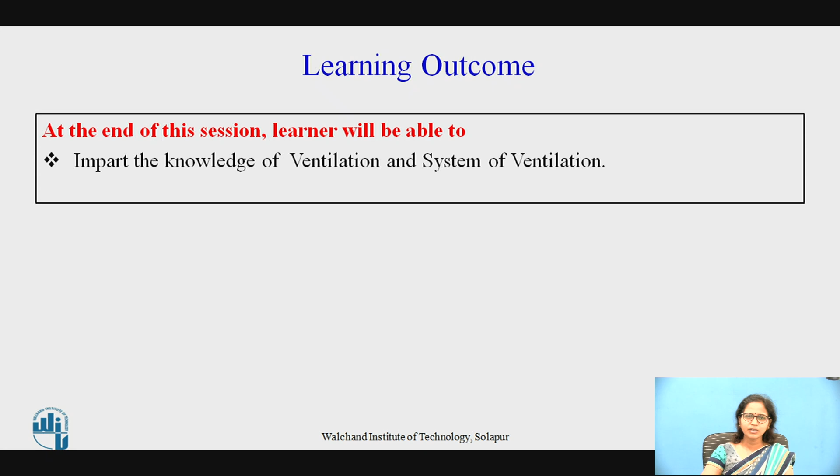So ventilation is defined as a process of removing or supplying the air by the natural or the mechanical means to and from an air source or any space. So actually ventilation is to remove the contaminated air which is infected due to the products of the combustion, or it may be due to the odors. So it has to be replaced by the fresh air. So the sufficient ventilation is to be supplied to a room.

So as it may be due to the increase in the temperature or due to the air which is infected, and to remove the contaminated air which is infected by the bacteria, respiration, etc. So actually an unventilated room may lead to the discomfort to the living conditions of the people, and also that may be due to the increase in the dust amount, or it may be due to the increase in the excessive carbon dioxide, carbon monoxide, etc.

So next, a poor ventilation room may lead to the discomfort or the uncomfortable living conditions to the occupants who are actually using the building. So that may be due to the increase in the temperature limits which has to be maintained. It may also cause lack of sweating and humidity, which may lead to the inattentiveness, and it may cause even the headache or the sleepiness. So sufficient ventilation has to be provided for the rooms.

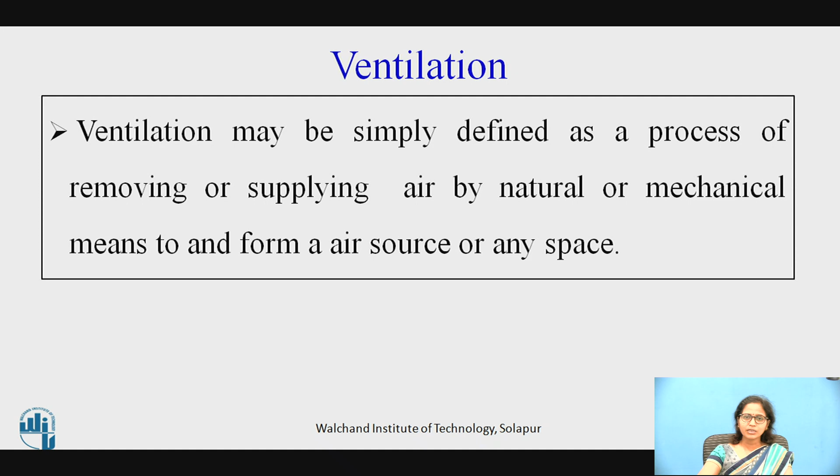So even the ventilation which is needed for the breathing, other than that the fresh air which is needed to survive in the room itself, depends upon the outer conditions, where exactly the building is located. So depending upon the outer conditions such as the concentration of the carbon dioxide and all, the minimum quantity of the fresh air has to be supplied to any type of the building. So for this the ventilation system has to be taken into consideration.

So the importance of the ventilation. Actually it prevents the undue concentration of the body odors, the fumes, dust and the other industrial products. And also it prevents the undue concentration of the bacteria carrying the particles. And it removes the products of the combustion, and in some cases it removes the body heat and the heat liberated by the operation of the electrical and the mechanical equipment.

And actually there should be continuous air movement or air changes should take place in the building or in the room, as due to the working of the machines or anything there may be heat liberated, and that air has to be replaced. The air which is contaminated, or if it is infected due to the products of the bacteria or the body fumes, anything, has to be replaced by the fresh air. So there has to be continuous air movement or the air changes. So to create the healthy living conditions, ventilation is also important.

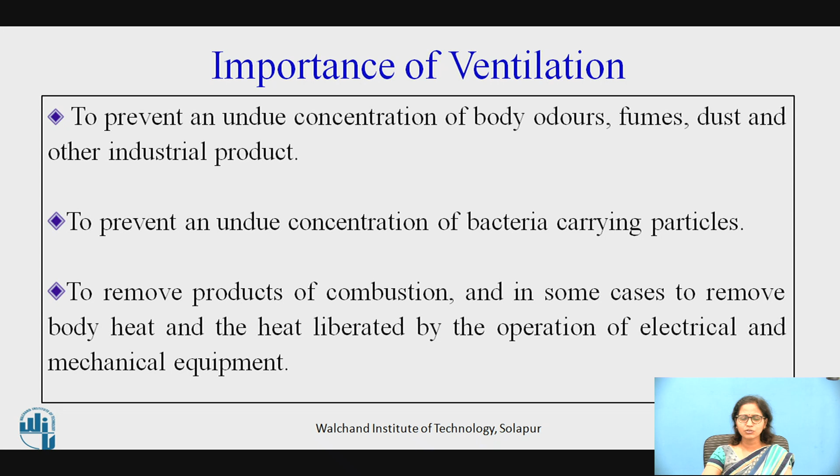So the number of the doors and the windows has to be provided in all types of the building and in the rooms. So depending upon the use of the room, number of doors and the windows has to be decided depending upon the number of the occupants also, and the age of the occupants, that factor also has to be considered while deciding the system of the ventilation.

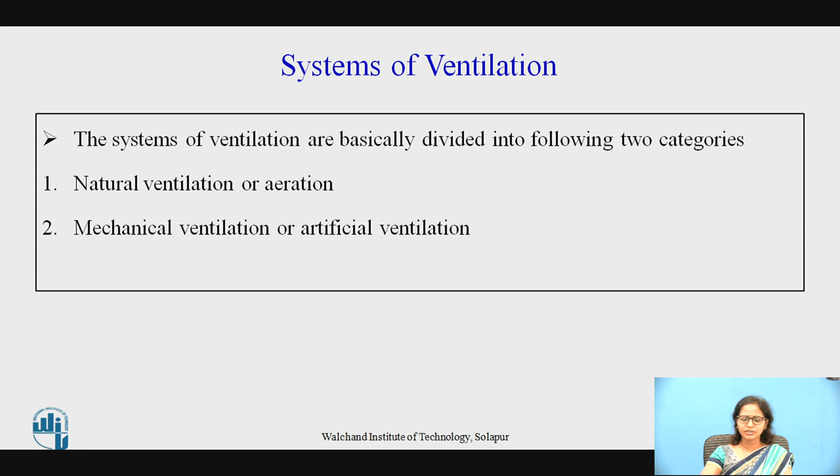So these are the systems such as natural ventilation, which is called as the aeration, and second is the mechanical ventilation or the artificial ventilation. So these are the systems of the ventilation. Actually there are different types of the systems. So out of that we are going to see the natural ventilation and the mechanical ventilation.

So in the natural ventilation, actually the number of doors and the windows are provided. So the outside air is supplied into a building through doors and windows, ventilators or any other openings. So minimum quantity of the fresh air has to be supplied to any type of the building. So this system may be employed where precise control over the air's conditions and the rate of the air changes is not required. So the minimum and the maximum rate of the air changes per hour are 1 and 60.

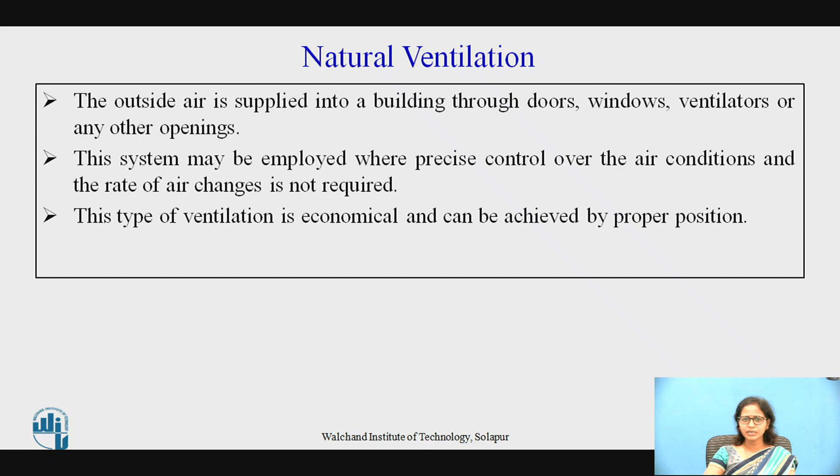So this type of the ventilation is economical and it can be achieved by the proper position. Whereas in the auditoriums or the shopping malls, this type of the ventilation is not at all feasible.

So the rate of ventilation depends upon two factors, the wind effect and the stack effect. In the wind effect, the ventilation is affected by the velocity and the direction of the wind, which depends upon the size and the position of the openings. So here you can see when the wind blows, this is the wind movement.

So pressure differences are found. On the windward side, positive pressures are developed, whereas on the leeward side we have negative pressures. On the opposite side you can see there is suction developed over there. So this is a roof pitch greater than 30 degrees.

So let's see when the roof pitch is less than 30 degrees. Positive pressures are created on the windward side, whereas negative pressures are developed on the leeward side, and suction is developed on the opposite side. Next is the flat roof. Even in this case, the wind effect will be the same. Positive pressures are developed on the windward side and negative pressures on the leeward side, and suction is developed on either side. So these are the wind pressure and suction zones.

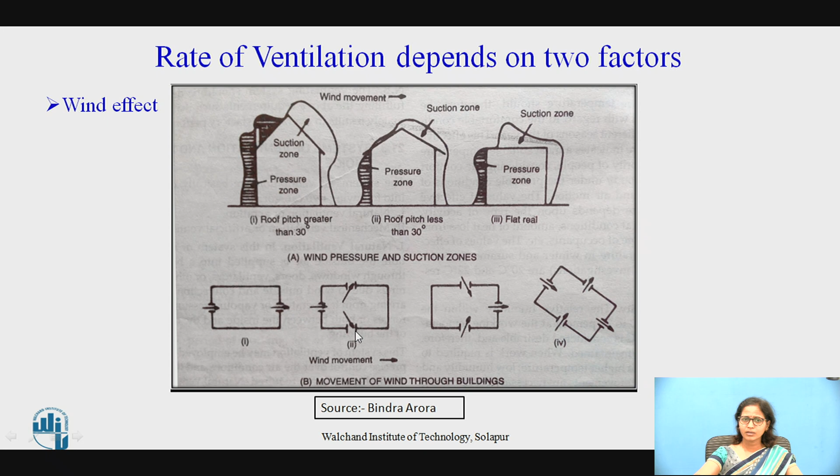Next is the stack effect. The stack effect is due to temperature differences. The ventilation depends upon the temperature differences, and it may even be due to vapor pressure differences. Whatever incoming air enters into the room should be cool in summer and warm in winter.

If the temperature of the wind blowing is more than the room temperature, then whatever air is inside should flow away so that the cooler air from outside replaces it. Here you can see the inlet at a lower level, and this is also affected by the height of the room. Temperature differences are created due to the height of the building too. The inlets are provided at a lower level, whereas the outlets are provided at a higher level of the building. This is the floor level.

Through the inlet, air will enter into the building to cool the floor. The cool air outside comes into the building through the inlet, and the warm air flows out through the outlet provided at a higher level. Next, if the building has much height and there is an outlet at the roof level, the cool air enters through the inlet, whereas the warm air inside at the floor level rushes out through the outlet provided at the top.

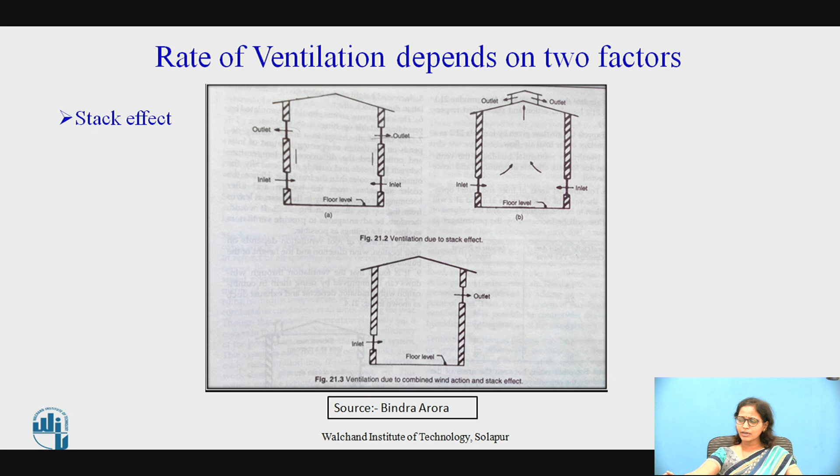Next you can see ventilation due to combined wind action and the stack effect. If both effects come into existence, what will be the effect? Through the inlet the cool air enters the room, and whatever warm air is inside the room rushes out through the outlet provided at the top level. There is a single outlet here and a single inlet at one corner, provided at a lower level, at the floor level.

Mechanical ventilation. The following methods of mechanical ventilation are in common use: first, the exhaust system; second, the supply system; third, the combination of exhaust and supply systems; and fourth, air conditioning.